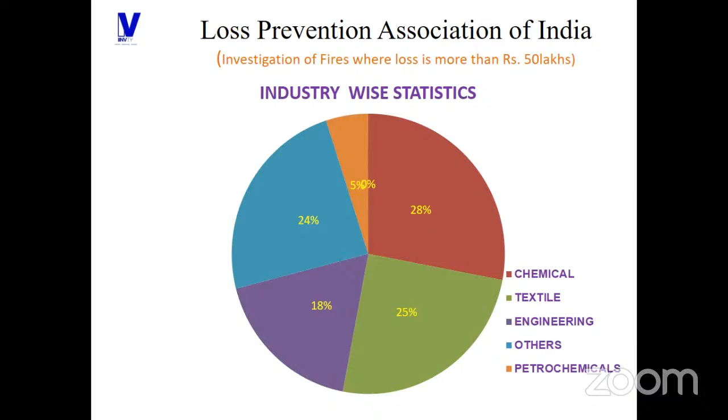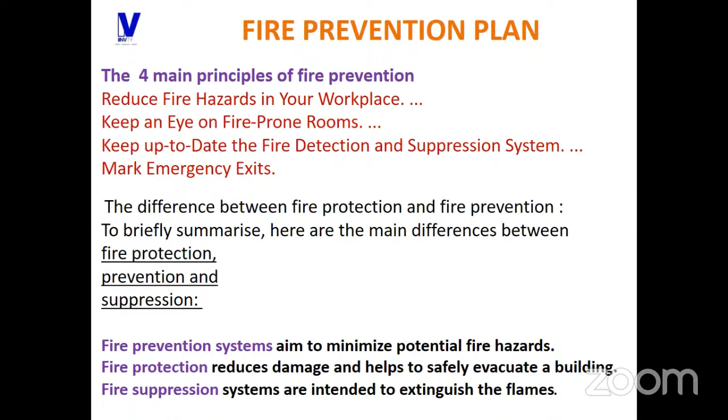Next, in the fire prevention plan, what the professional masters insist is that you have to make everything checklist based, so periodically we have to monitor. Otherwise, what happens is that in the initial moment we have successfully implemented everything, but over the period of time, if we are not monitoring at a particular interval, there are more possibilities of fire occurring. So considering this case, at periodical intervals we have to check everything through the checklist. So checklist implementation is one of the important ones in the fire prevention plan.

Okay, once we started the session, first we have seen the fire risk assessment - this is one element, and second one, fire evacuation plan - this is second, and third one, separate fire prevention based plan - this is the third plan, and fourth one, fire protection plan.

Normally in the fire protection plan there are two categories, classified as: one is active firefighting system, second is passive firefighting system. Active firefighting system means whatever we are visibly seeing, we are taking support from - for fire controlling or fire extinguishing purposes, whatever equipment we are visibly seeing in front of us, we are taking support from that. For example, fire hydrant system, fire sprinkler system, fire alarm system, fire detection system, portable fire extinguishers, fire assembly point - everything comes under active fire system. Then, passive firefighting system.

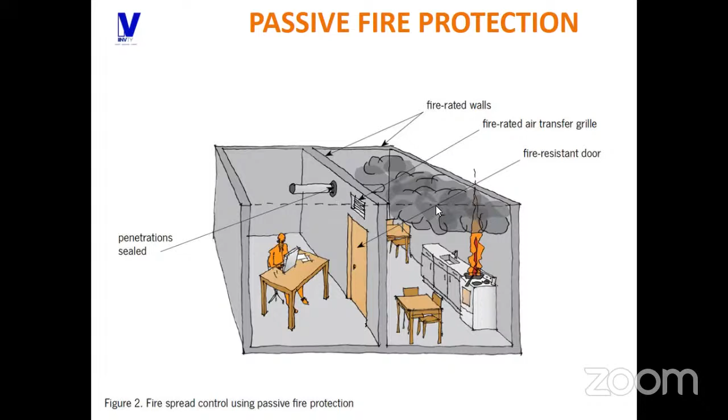Like whatever doors are placed there, everything should be fire resistance doors. Then fire-rated air transfer grille, proper wall, totally for fire-rated walls, so there are no possibilities of fire breaking the wall. So this is passive fire protection.

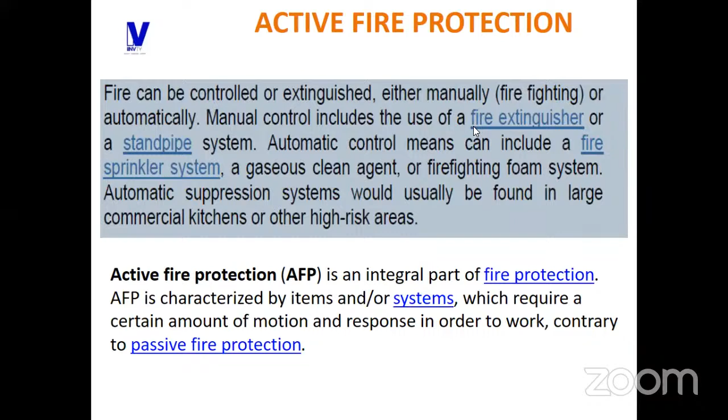Another one, active fire protection, sir. Active fire protection means, if we implement active fire protection in our plant, what type of benefit will you get, sir? This is fully for extinguishing the fire, sir. If we implement active fire protection, it means it will definitely and surely extinguish the fire.

What are all the examples of protection? So initially I told you, whatever we physically see, whatever support we take from fire extinguishing or fire control equipment, everything comes under active fire protection. For example, manual call point, fire alarms, hose reel, fire detectors, smoke detectors, fire alarm, portable extinguishers, pressurized escape route, everything comes under active fire protection.

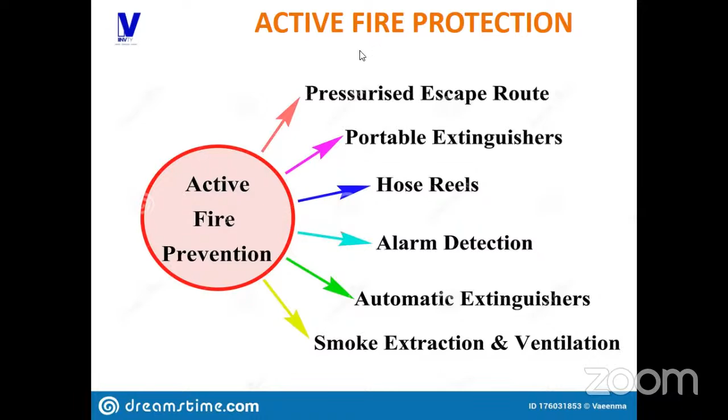Okay, next fire safety element, manual call point. Generally in industries, we use two types of manual call points: one is indoor call point, another one is outdoor call point. Indoor call point means in case any kind of fire happens inside the building, and outdoor call point means in case any fire happens outside the building. So for both purposes, we use both types of call points in industries, sir.

Normally, if you are placing the fire call point in the building, it should be installed at a height of 1.4 meters above the floor level, sir. This is the standard practice. In any kind of situation, the manual call point, MCP, should not increase in height beyond 1.4 meters from the floor level. This is another important point. Depending on the industry, the MCP placement may vary, sir.

For example, if you are working in the oil and gas sector, there are more possibilities of gas leakage. So in general industries, in case of an oil storage area with a mass volume of oil, or if you have a chemical laboratory, there are more possibilities of flammable materials. So depending on the industry requirement and workplace requirement, we have to place the manual call points. If it is required for gas release, you can place a gas release based manual call point.

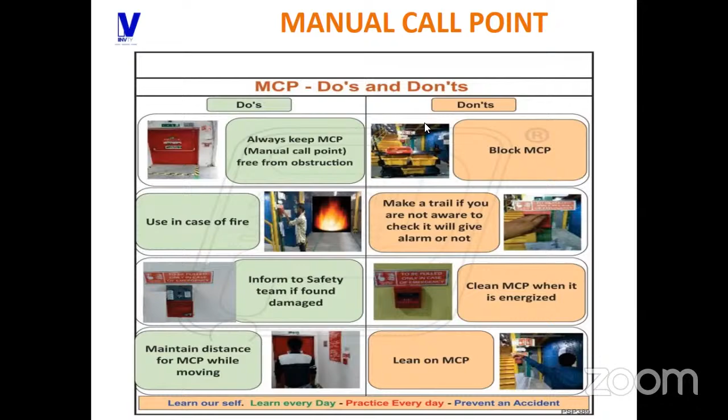Another element, fire alarm sound. This is another important one, because in case of any fire or any emergency situation happening in the plant, people will easily get to know through this alarm. The main purpose of the fire alarm is creating awareness.

Normally this word 'alarm' comes from the French. It came from French soldiers, who used the word 'alarmee'. Over the period of time, it transformed into alarm. The main purpose of the fire alarm sounder is indicating the fire signals.

Next element, fire alarm systems. This is one of the important proactive fire safety elements. In our industry, if there are flammable related sources, once fire happens... for example, if you take the office premises, the fire risk category is very low, because there are only electrical or electronic items. But if you take the oil storage area or the warehouse, the severity level may get exceeded. So depending upon the workplace, we have to place the fire alarm system.

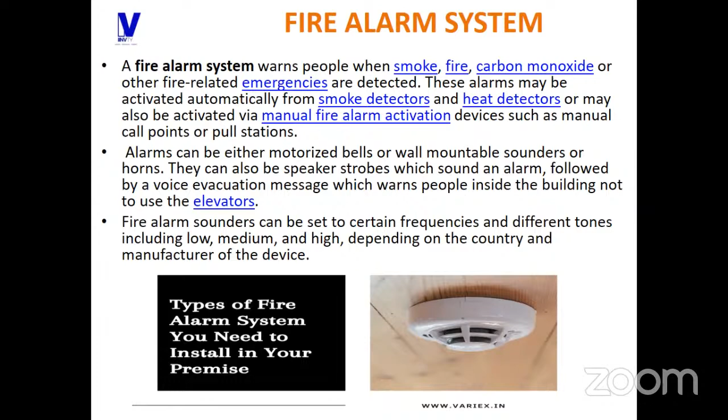Once fire happens, there are possibilities of smoke, heat, or flame - both things we have to consider. So before placing the fire alarm, we should consider which type of material is placed there, and once fire happens, the flammability range - everything we should consider in the fire alarm system.

Normally in the fire alarm system, there are three types: one is ionization, another one photoelectric, and the third one combination.

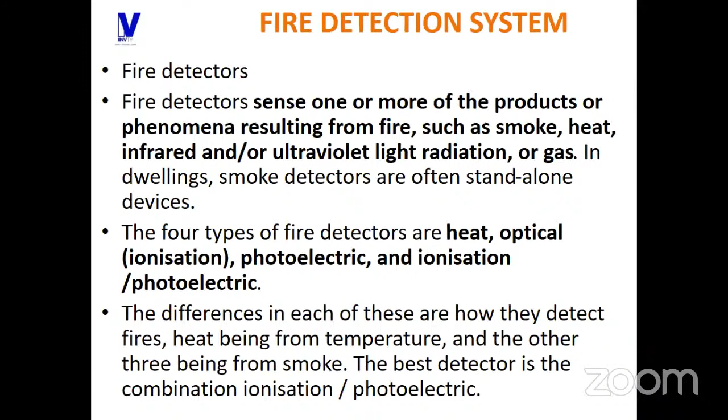Then fire detection system, this is another important one. Fire detectors - in case of any fire happening, we can identify which location the fire specifically happened. So fire detection plays a major role in fire safety. There are different kinds of detectors, for example smoke detectors, heat detectors, flame detectors, and combustible gas detectors. Whatever our requirement, we have to place one particular detector accordingly.

For example, in our industry, if I have an LPG bullet yard, or an ammonia storage yard, the leakage possibility will be through air only. In that location, I should consider only gas detectors. So depending upon what type of materials are placed there, and how the flammable sources occur - through air, heat, or flame - based on that, we should place the detectors.

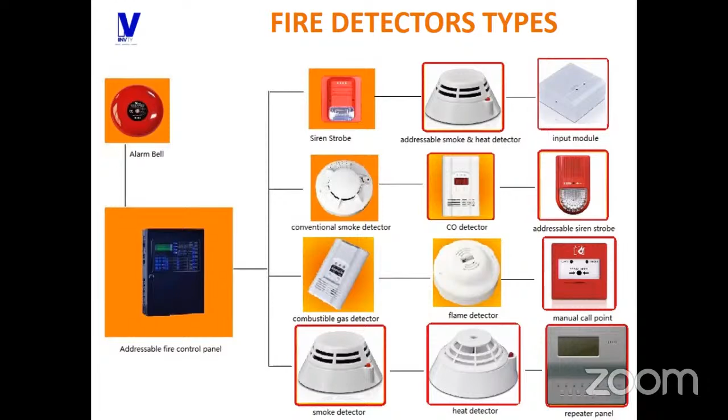Another important element in proactive fire safety is the fire sprinkler system. Generally there are two types of fire sprinklers: one is upright type, another is pendant type. Mostly everywhere pendant type sprinklers are used, but depending on requirement, upright type also plays a major role. Apart from that, different types of sprinklers are available in the market. Depending upon the work location setup, we have to place the sprinklers accordingly.

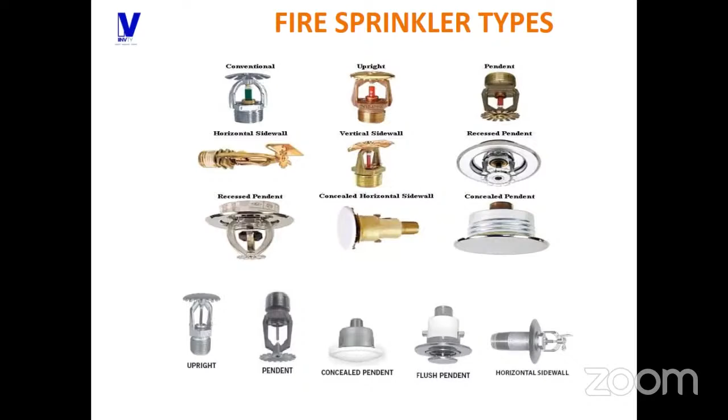Another thing - this is the basic function of a sprinkler. If you see any kind of sprinkler, in the top portion water flow will be there, a central portion plug, third the liquid, and fourth the sprinkler itself. Any sprinkler placed on the floor normally has 5 to 7 bar pressured water in the backside of the top portion of the sprinkler.

There are about 6 classes of sprinklers. Different types of sprinklers are practiced because, for example, if the room temperature is within 57 degrees centigrade, I can prioritize the orange color shaded fire sprinkler system. In case I am placing oil storage or oil-based equipment, like petrol, diesel, or any highly flammable oil, I would place a 68 degree type fire sprinkler. The ultimate motto is what type of material we are placing there - in case flammability happens, the flammable ranges should be considered, and based on that the particular fire sprinkler should be placed.

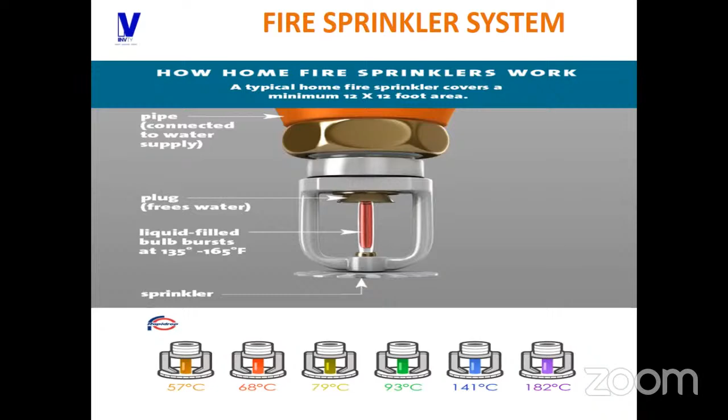And another thing, fire hydrant system, sir. So almost we are in the closing stage. Fire hydrant is not mandatory for all industries, sir. While you get the fire license, the local fire officials will make a visit. Based on the document submission and process of operation, they will insist you implement the fire hydrant system. In case that particular fire hydrant system is not applicable, then it is okay. So generally in industries, if you practice fire hydrant system, there are so many components. This comes under fire hydrant system.

Fire pump house. So sorry, sir, please mute, sir. Dear participants, please, sir. Yes, sir.

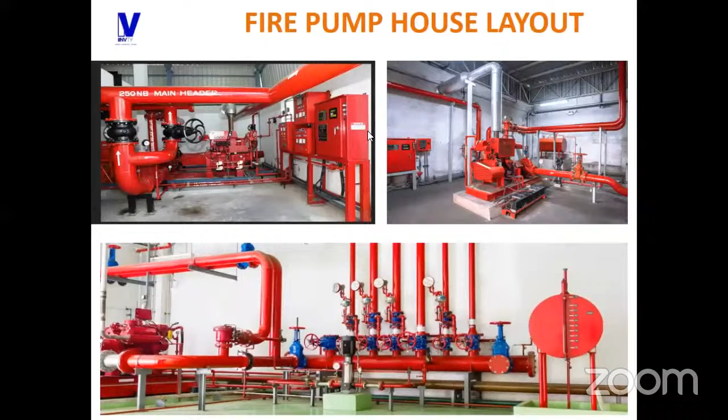Fire hydrant system, another one, fire pump house. This is one of the very important ones. In our body, heart is playing the major role. So in absence of heartbeat, we are not able to survive. Likewise, in the fire hydrant system, fire pump is the heart of the overall fire hydrant system. So this is the general setup of fire pump house. Normally in the fire pump house, different types of pumps are placed inside, like jockey pump...

Called as booster pump.

Sir, your voice is not clear, sir.

Main pump, and hydrant fire sprinkler pump and diesel engine pump. So these are all the basic requirements of fire pump house.

Then another thing, this is the basic fire pump house component. Now is it okay, ma'am? Yes, sir, sure, now is it okay? Yes, sir, it's okay. Hello dear sir, participant, you can continue, sir. Now I am audible, sir. Okay, sir, yes sir, thank you ma'am.

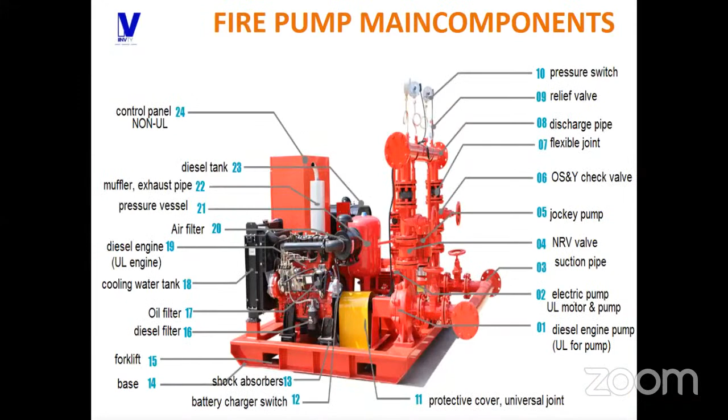Yes sir, fire pump main components. I already told you fire pump is the heart of fire hydrant system. If you place the basic fire pump house in your plant, these are all the components.

Mr. Munish Gumudi is asking to please repeat once again, sir. I can repeat the previous slide. Fire pump house. With your permission, I am repeating this slide once again.

Fire pump house, if you have this in your plant, normally there are 4 types of pumps available inside the fire pump house. One is booster pump, another diesel engine pump, then fire hydrant main pump, then fire sprinkler main pump. These are all the 4 major pumps placed in any kind of fire pump room.

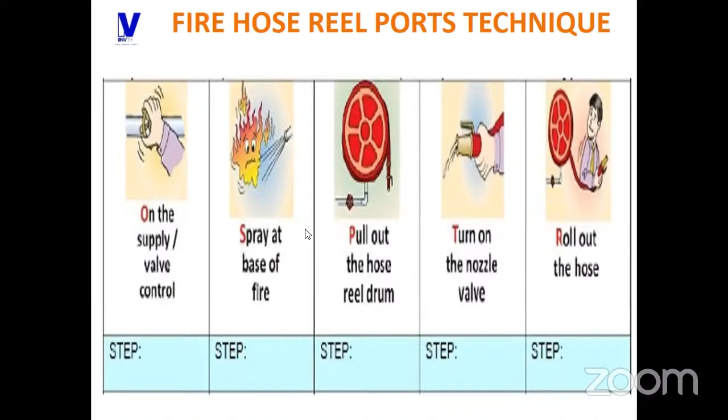Similarly, for PASS, in case of any fire, we use the fire extinguisher for the method of PASS. Similarly, while using fire hoses, globally it is practiced as the fire hose reel PORTS technique. PORTS means P-O-R-T-S. First, P, pull out the hose reel from drum. Next, O, on the supply and valve control. R stands for roll out the hose. T stands for turn on the nozzle valve. Finally, S stands for spray at base of fire.

Then fire water storage system, this is one of the important ones, sir. If you implement fire safety system in your industry, water is one of the mandatory ones. Normally, there are two types of water practiced in industries: one is sump water and another is terrace water.

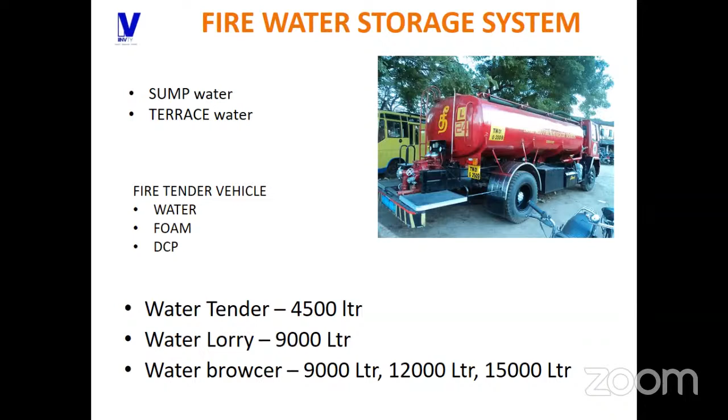And fire control panel system, this is also one of the important ones. So whatever we have seen, for example, once again I'm repeating.

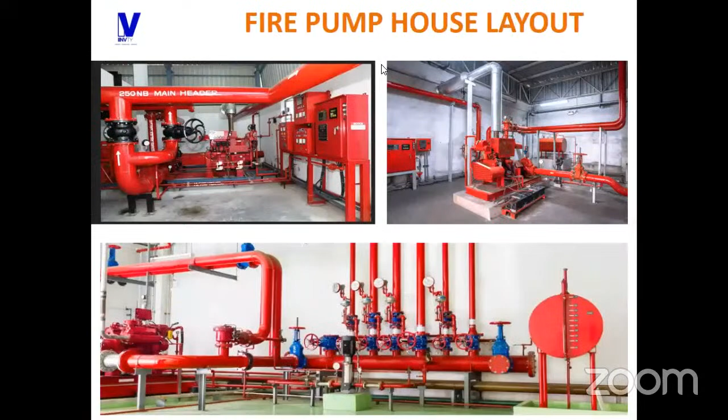In the fire protection plan, there are two types of plans: active firefighting and passive firefighting. Whatever comes under active firefighting system category, like fire detectors, fire alarm, manual call point, fire sprinklers, everything, the automation should be controlled. For that case, we are implementing the fire control plan through the panel system. Through this panel, we can easily identify in which location fire happened, or which location smoke got detected, or which location the heat detector functioned. Everything we can get through this control panel system. So implementation of fire control panel system is one of the important ones, sir.

And we are in the closing stage. And finally, fire extinguishers. Different kinds of fire extinguisher - already you must know there are some dry chemical powder, carbon dioxide, foam. These are all the basic fire extinguishers we practice in the industries, portable type. So which type of fire extinguisher needs to be used for what purpose - based upon the risk assessment, fire extinguisher should be placed in the workplace itself, wherever the requirement meets.

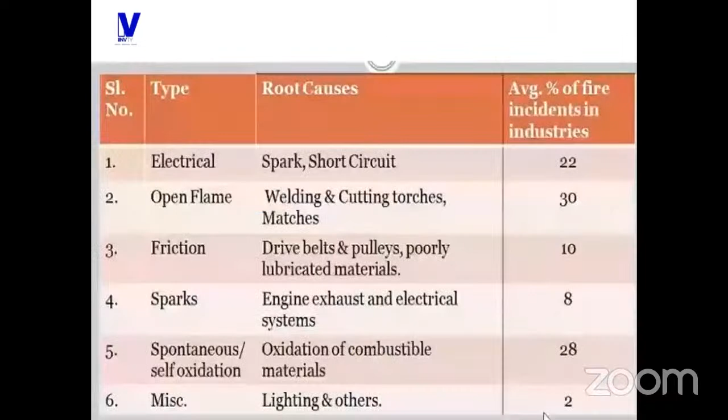Okay, sir, so that's it from my side. And this is the last forum. Initially I told you, so once again I can recall, sir. If you are going to implement the best fire safety system in your industry, or already have implemented it, or want to fine tune which area to improve, as per the expert's point of view and professional master's point of view, they have listed out some 15 proactive fire safety elements. So once again I can list them out, sir.

First one, fire safety based risk assessment. Second one, fire safety based emergency evacuation plan. Third one, fire prevention plan.

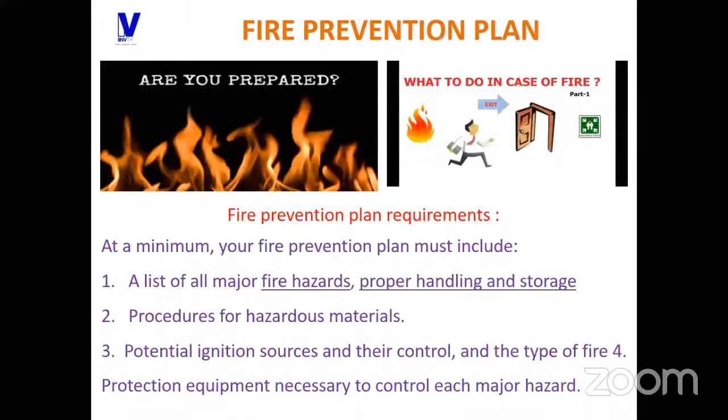Then fire protection plan. We have to consider both active and passive firefighting systems in our industry. If active firefighting system is required, I can go ahead and engage it. Or based upon the risk assessment, if I have identified passive firefighting as the requirement, then you can proceed for passive firefighting system.

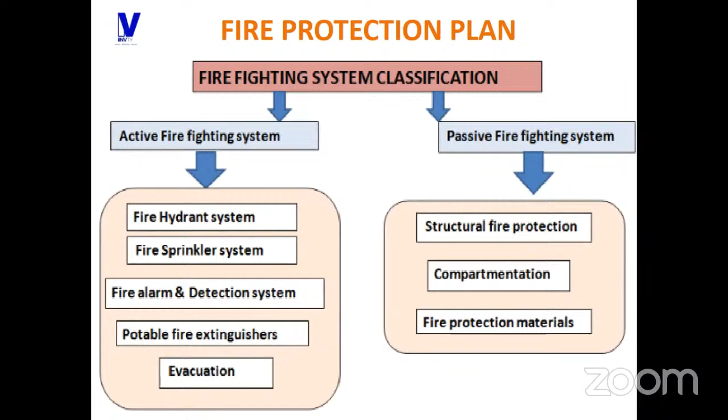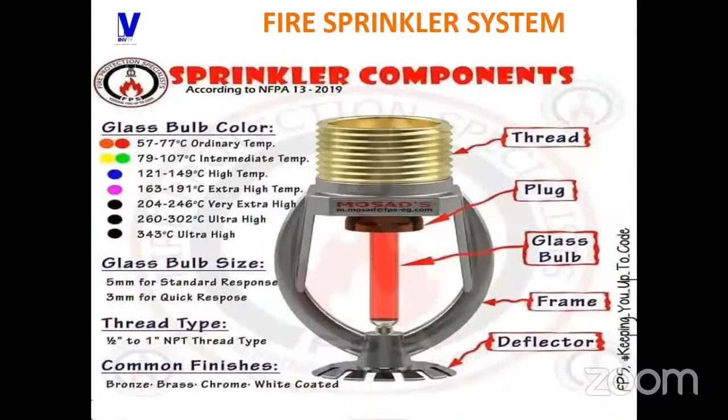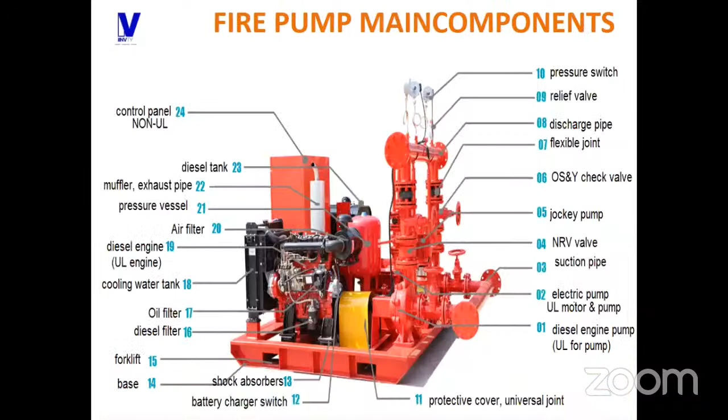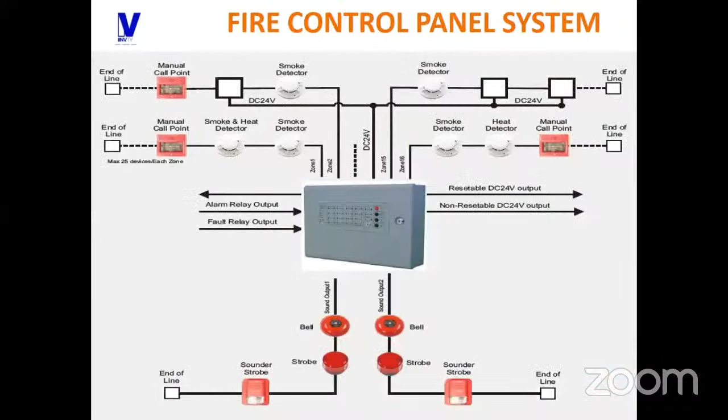On the examples: manual call point, fire alarm hooter and sounder, fire alarm system, fire alarm monitoring, fire detection system, different kinds of detectors, and fire sprinkler system. Then fire hydrant system, fire pump house, fire hose cabinet system. Then fire hose reel system - because cabinet is only for empty, if you haven't placed the roll, it comes under cabinet system. So fire hose reel system, then fire water storage, finally fire control panel system, then fire extinguishers. Apart from these are all the basics.

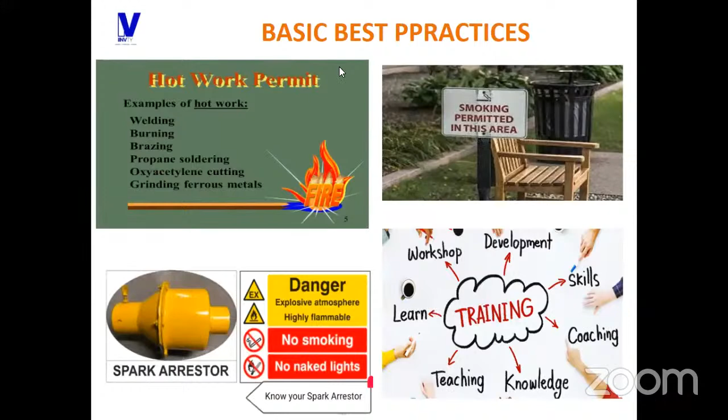Please, last few minutes, sir. We'll close the session, sir. Please, sir, I'm continuously getting noise. These are all the basic requirements. Apart from this, okay, sir.

Initially I told you fire safety, especially in the proactive manner, is one of the vast and enormous forums. We are not able to discuss everything within this stipulated short span of time. I have tried to cover the major elements, whatever the experts' point of view insisted, and I have distilled and covered it in a basic manner.

Apart from this webinar, if you are interested to enhance your knowledge in fire safety, these are the learning platforms available. First, the legal category - the Factories Act 1948. Whenever you have any kind of clarification or doubts, you can always refer to it. We are in Tamil Nadu, so the Factories Act 1948, Sections 31, 36, 36A, 37, and 38 are fully for fire safety related matters. Then Tamil Nadu State Factories Rules, Rule 61 for fire protection.

Apart from the Factories Act and factory rules, we are dependent on the local fire service department for getting the fire license. Considering this, the Tamil Nadu government also has separate acts and rules we have to refer to, like the Fire Service Act and Rules. These are all the major fire-based legal rules and acts practiced in India. For example, if you are working in the oil and gas sector, the Petroleum Rules 2002 Rule 117, SMPV Rules 1981, and Indian Standards for BIS. There are some 200 plus fire safety based codes.

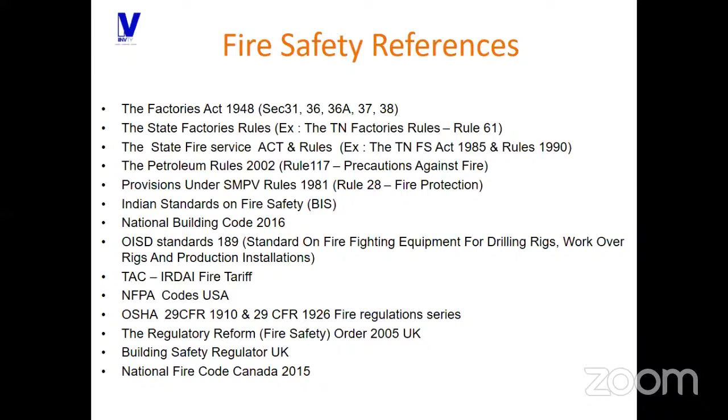Last only one second, sir. Only one document, sir, I can show you this also.

The screen is not refer... oh sorry sir, the screen is not visible, sir. Screen not visible, sir. One second, sir.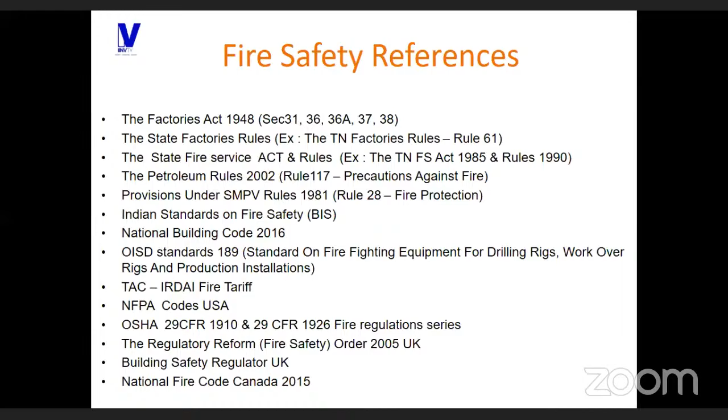Now is it okay, sir? Yes, sir. Okay. Sorry, sir. Building, once again, sir, we have discussed it.

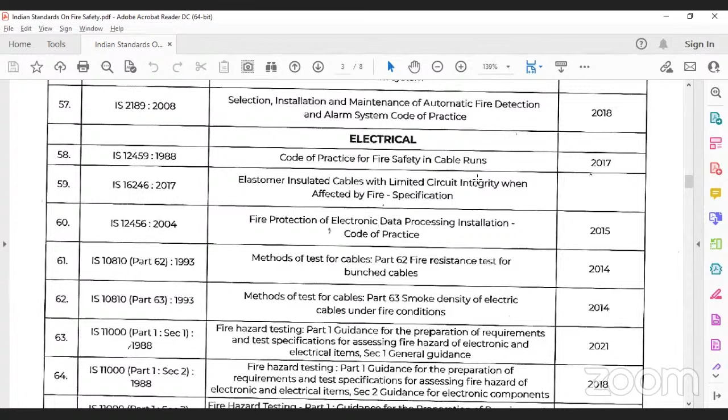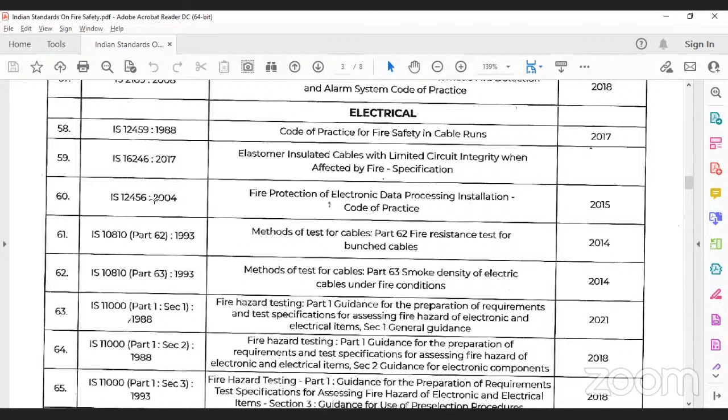Detector system, IS 11360, recently enacted in the year 2015. Whatever the 200 plus fire safety related IS codes, everything is available on Google. Whenever the requirement meets, you can download it. For example, electrical based - if you want to refer and escalate your knowledge in the fire safety sector, these are all the standards. In case while erecting a new plant, if there is an electrical based requirement in a particular area you want to implement, you can refer from 58 to 67, sir.

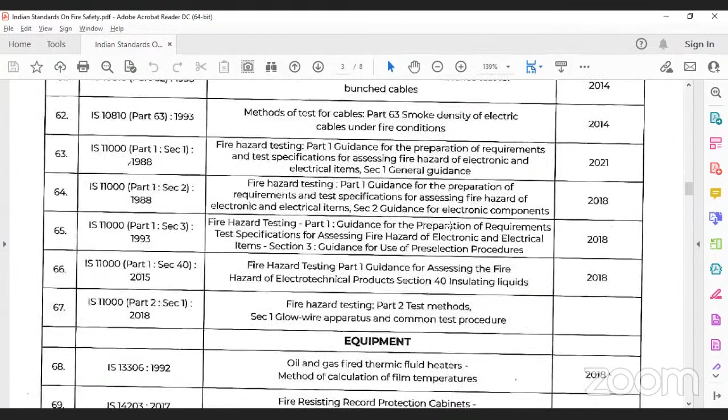Okay, sir, and one last thing, sir. National Building Code - this is one of the important ones. Because if you are discussing in a proactive manner or any kind of manner in fire safety, without discussing the National Building Code, the session definitely will not be complete.

Because the National Building Code plays that much of a role in the fire and safety sector. Is this National Building Code visible, sir? Visible, sir. Okay, sir. First, we have seen after completion of the session what are all the fire safety based national and international level rules and regulations and acts practiced in India.

First we saw that one. Then second, we saw what are all the fire safety based Indian standards available in India - almost 200 standards are there. That one we have discussed.

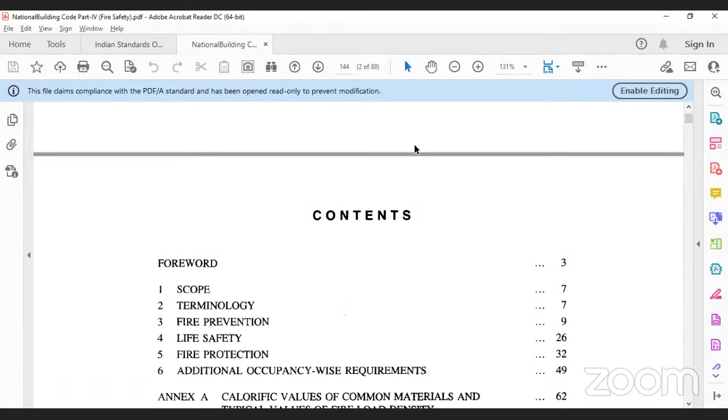And third one, National Building Code. The National Building Code is enacted in the year 2016. In that National Building Code, Part 4 is fully for fire and life safety. For example, one second, sir - in that Part 4, they have listed fire safety into different categories.

For example, one second, sir, I can show you. In the fire prevention category, they have classified buildings into group A, B, C, D, E, F, G, H, J. We all are working in the industrial sector, so group G comes under our picture, sir.

So whenever you have any kind of fire safety related clarifications, especially if you want to refer, the first and foremost choice is this National Building Code, sir - especially group G. For example, if I am working in the educational sector...

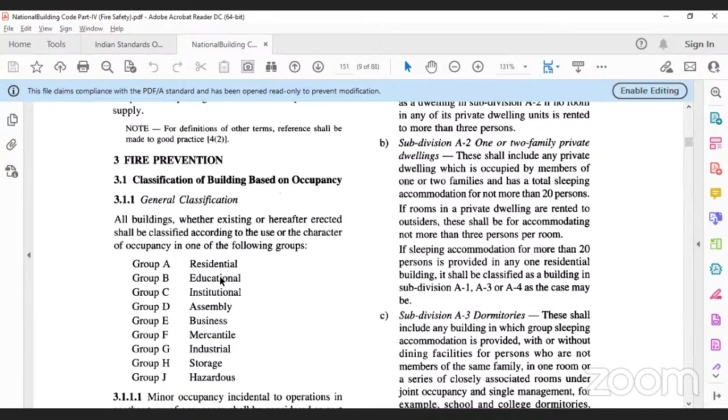I am having one educational building. I want to implement the fire safety system. What are all the legal formalities and legal requirements? If I don't have any idea, the first and foremost choice is you can refer to group B. Once you refer, you will get basic as well as full-fledged ideas, sir.

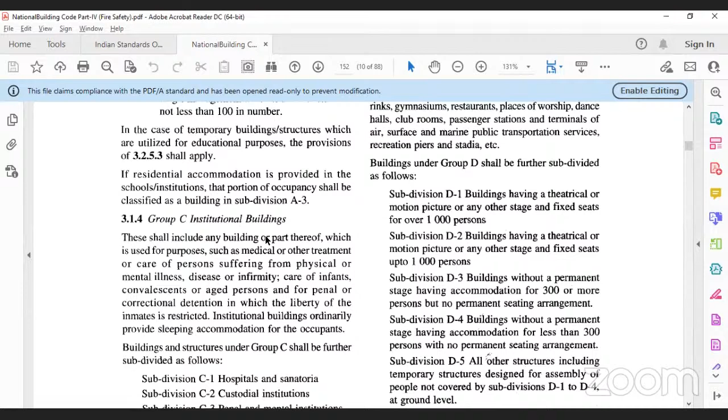For example, as per the National Building Code, what they are insisting in India is that if you are having more than 15 meters of building - for example in your industry, if you are having more than a 15 meter high-rise building - then the fire license is mandatory. So likewise, there are so many points they are insisting on.

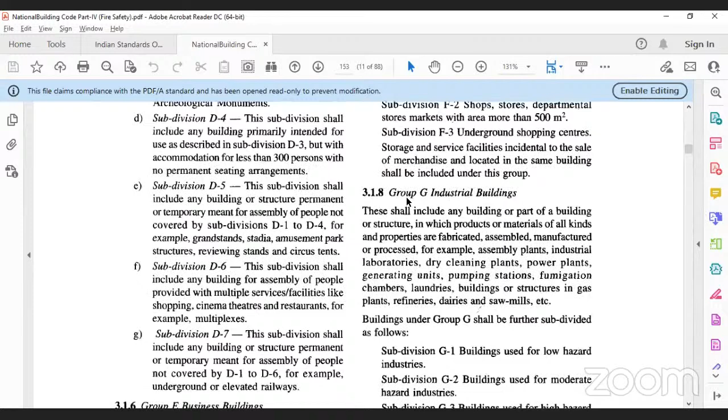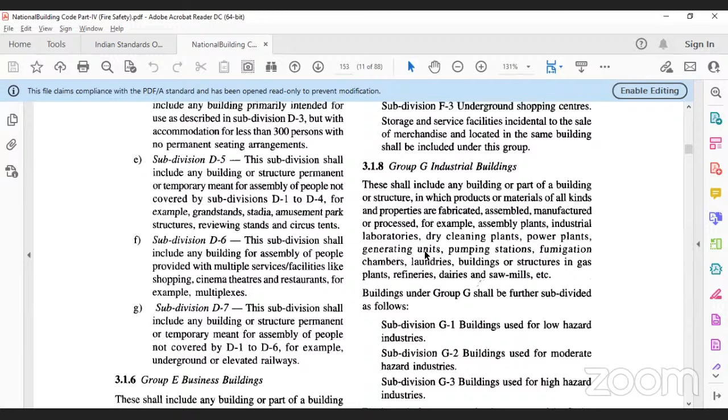Group F, Group G - industrial buildings. What are all the buildings that come under the industrial category? For example, assembly plants, industrial laboratories, dry cleaning plants, power plants, generating units - likewise everything comes under industrial buildings. Apart from this, they have listed industrial buildings into 3 categories: low hazard buildings, high hazard industries, and finally moderate hazard industries.

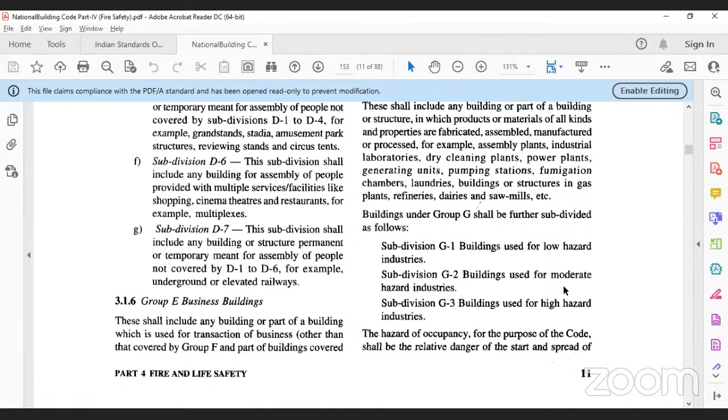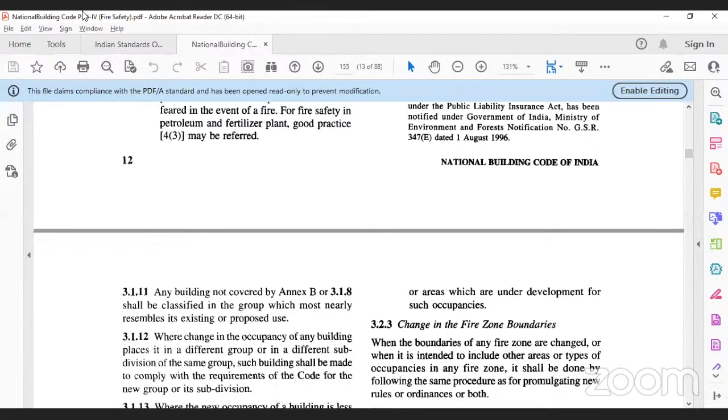So that's it from my side, sir.